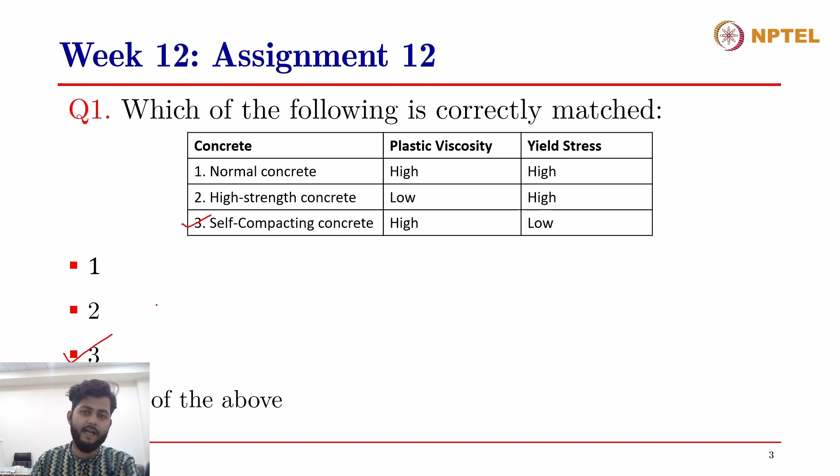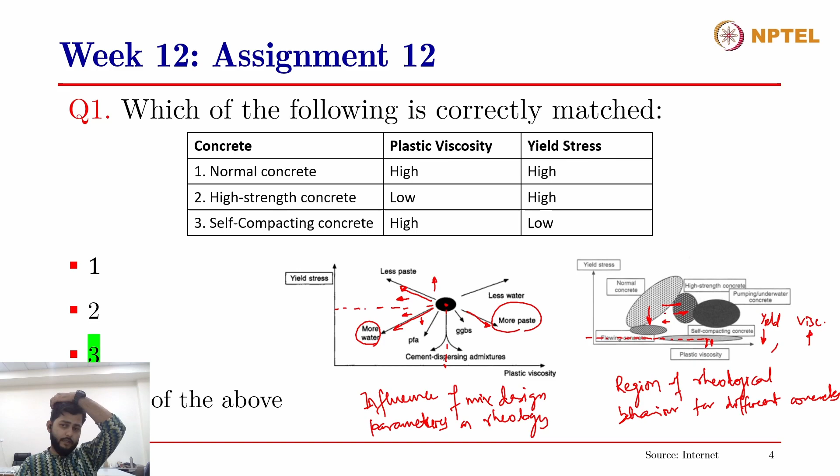Again, you need to also understand that self-compacting concrete mixes also contain a lot of cement. The cement content in these mixes is very high as compared to normal mixes. Therefore, the viscosity increases ultimately. But then you want a higher slump flow in this case. So you have to decrease the yield stress as well. In order to decrease the yield stress, they use a lot of superplasticizer as well. So this is how you can distinguish between the rheological behavior of different types of concrete.

All right. Moving on to the second question, which of the following statements is true? Statement one is L-box test is a measure of viscosity. Statement two is V-funnel test is a measure of segregation. Statement three is slump flow test is a measure of fluidity. Which one of these is true? Can you answer?

Yes. Would you like to answer, Abdul? Which of the following statements is true? Yeah, that is third, the slump flow test is a measure of the fluidity. Yeah. That is the correct one. The L-box test is not for viscosity. It is for another test. The V-funnel test is also not for the segregation test. That is another one. Actually statement three is the correct one.

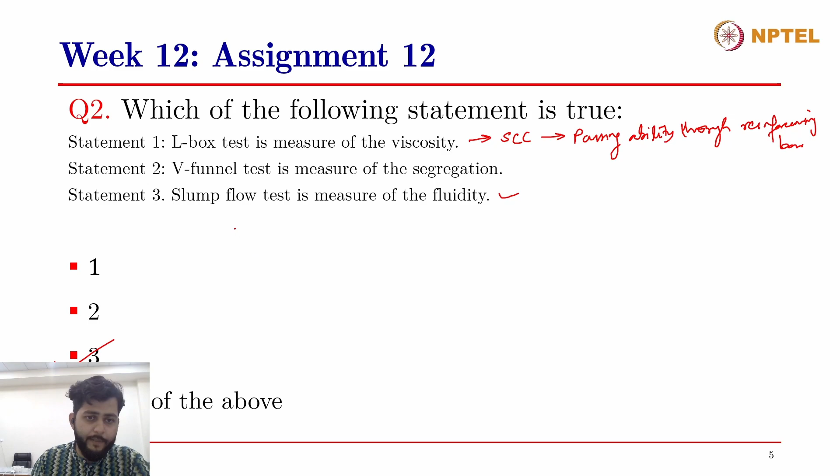But let us say you want to cast a concrete pavement using the same concrete that you are using to cast the raft foundation. Would it be possible? No, because for concrete pavements, you would require a roller compacted concrete or something of that sort, which has a very low slump, right? So in that case, the zero slump concrete is workable. So workability is application based. Then a somewhat more refined term is flowability or fluidity.

So now you're distinguishing between if the concrete will flow or not. So in that case, you can directly distinguish between a roller compacted concrete and a pumpable concrete, because a pumpable concrete will have a higher fluidity as compared to that of a roller compacted concrete, right?

So these tests, L box, V funnel, compacting factor, VB tests or slump flow test, we do call them workability tests, but they are actually empirical tests of flowability, right? And then a rather physical definition of flow is rheology. The very basic definition of rheology is the study of flow or deformation of matter.

So any material in this world could be studied for its rheology. We do study ideal solids in the case of solid mechanics, but there is no such material as an ideal solid. Every material has some viscoelastic deformation throughout its age, and therefore we should be able to study its rheological behavior. Now, in the case of flowable materials, the rheology is very distinct. It is visible directly. The resolution of the rheological behavior is very high.

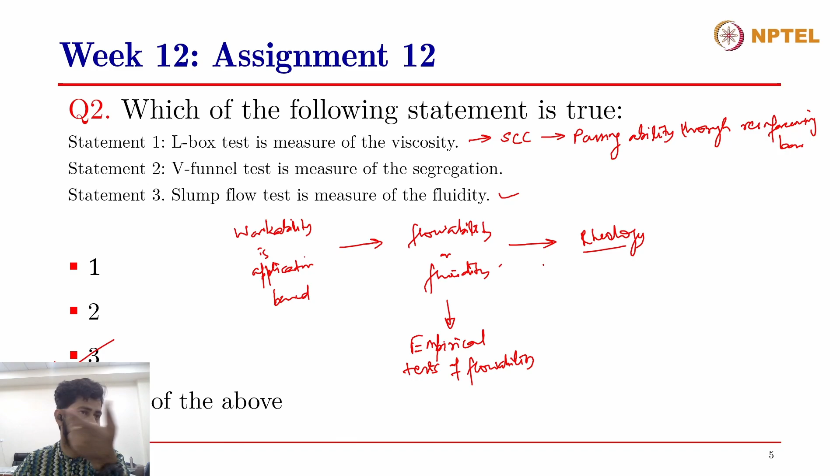But yes, V-funnel test can also be used to get an idea of segregation in the mix. I know of certain European guidelines on self-compacting concrete where they carry out a V-funnel test at T0, and then again fill the V-funnel, let the concrete settle for 5 minutes, and do the V-funnel test again. If within the 5 minutes the V-funnel times vary greatly, this could be a sign of segregation. There is no direct relation of segregation with V-funnel test.

All right. So the correct answer to this question is, in fact, slump flow test is a measure of fluidity. It shows the flowability in the concrete. Higher the slump flow, greater the fluidity. That's a very direct relation. All right.

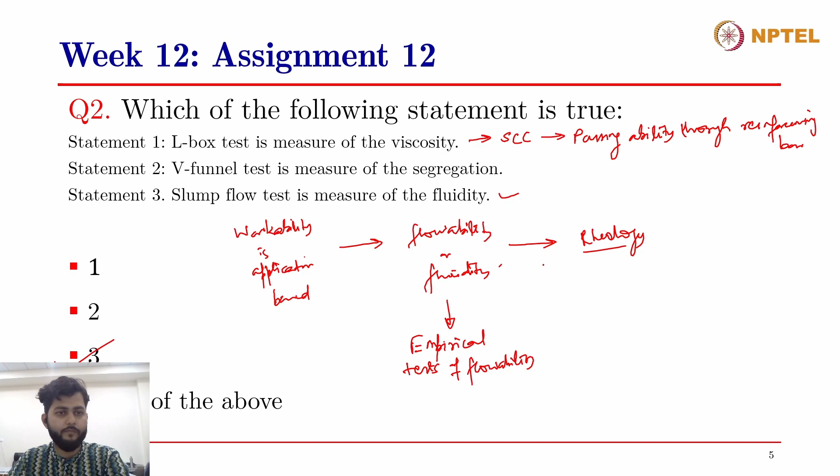The third question in this assignment was, which of the following statements is true regarding fiber reinforced concrete? Statement 1 was improves crack arresting property. Statement 2 is decreases the ductility. Statement 3 is improves the flexural strength. Which of these statements are true regarding fiber reinforced concrete? Yes, can you please answer?

Accepted answer 1 and 3. One, improves crack arresting property, and the third one, improves the flexural strength because of the fiber content. It improves the flexural strength and at the same time improves the crack arresting property. But statement number 2, decreases the ductility, is not correct. That means the answer is 1 and 3. Right. Thank you, Abdul. Yes, this is the correct answer.

So, in the case of fiber reinforced concrete, we know that concrete is a brittle material. So, when you put concrete under tensile forces or flexural forces, which ultimately lead to tensile forces in the bottommost fibers of concrete, it appears to crack and undergoes a brittle failure, right? Now, when you put any kind of reinforcement in the concrete, what we design the concrete to do is to allow the reinforcement present inside the concrete to take all the tensile load.

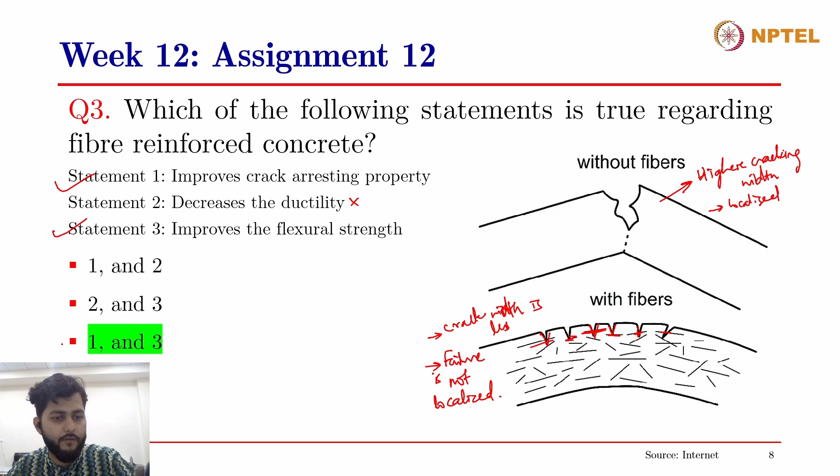Moving on to the fourth question: latex modified concrete is a type of polymer concrete composite, and latex behaves like rubber after coagulation. Is it a true or a false statement? Yes, sir. It is true because latex modified concrete, of course, has the nature of rubber. After coagulation, it is just like a rubberized surface. That means it is true. Right. Yeah. Thank you, Abdul. Yeah, that's the correct answer.

So latex modified concrete is basically when you replace some part of the cementitious material in the concrete by latex emulsion. It comes in the form of an emulsion in its raw state, and when it hardens, it behaves like rubber. So after coagulation, it behaves like rubber and has elastomeric properties, and therefore it adds more flexibility to the concrete, and in fact more elasticity. I would not say ductility, rather more elasticity to the concrete. Right.

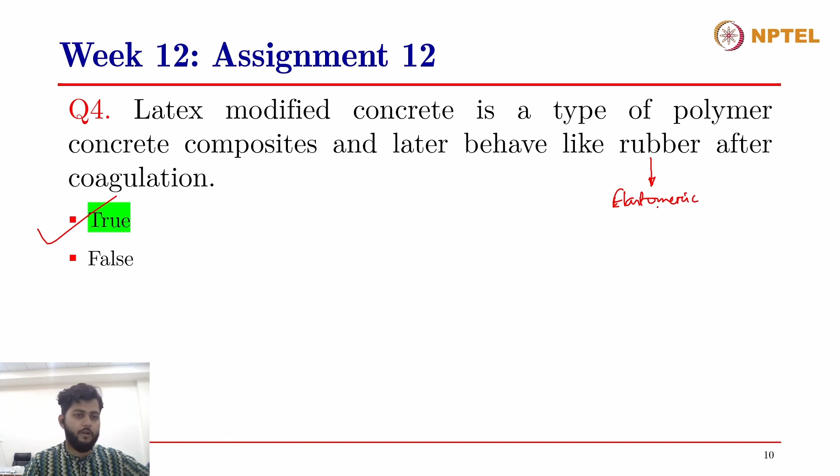Moving on to the fifth question, which of the following is correctly matched? The type of concrete and their applications have been given. The first one is latex type PCC, and the application is repair. Impregnated polymers, and the application is bridge decks. And heavy concrete, application being radiation shielding. Which of the following are correctly matched?

All are matching, sir. Latex type PCC is mainly used for repair purposes, and impregnated polymer is for bridge decking, because impregnated polymer gives a very high density and a very hard surface. Right. It is mostly used for bridge decking, but the only thing is impregnated polymer concrete is very expensive. But in special cases, especially for bridges, it is considered because the surface is very hard. That means the wear and tear will be less for bridge decking. Right. That is very important for the bridges.

And heavy concrete is mainly for radiation shielding, protecting an X-ray room and such, where gamma rays are present; that is protected with heavy concrete. Ordinary concrete is also mainly used for this, but it will be more thick.

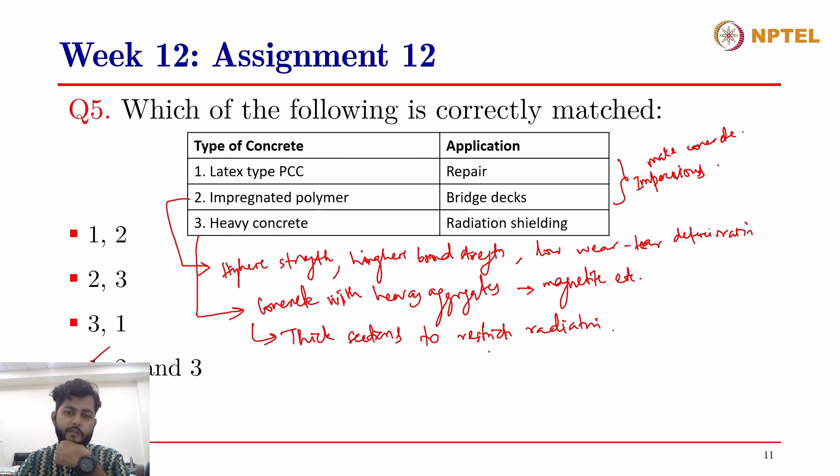Right? So the sections are also made thick, thick sections to restrict radiation. So this is heavy concrete which is used to make the walls and structural sections of nuclear reactors, right? So all these three are correctly matched, and therefore the correct answer is the fourth option.

Right? Moving on to the sixth question: which of the following are benefits of lightweight concrete? The options given are thermal insulation, sound insulation, both of the above, none of the above. Which of the following are the benefits of lightweight concrete? Yes, Abdul, would you be able to answer?

Yeah, this is thermal insulation. That is the main benefit of the lightweight concrete. At the same time, sound insulation is also sometimes used. So I have a doubt whether both of the above or only thermal insulation is correct. Little confusion. But according to me, my answer will be both of the above. That means thermal insulation as well as sound insulation.

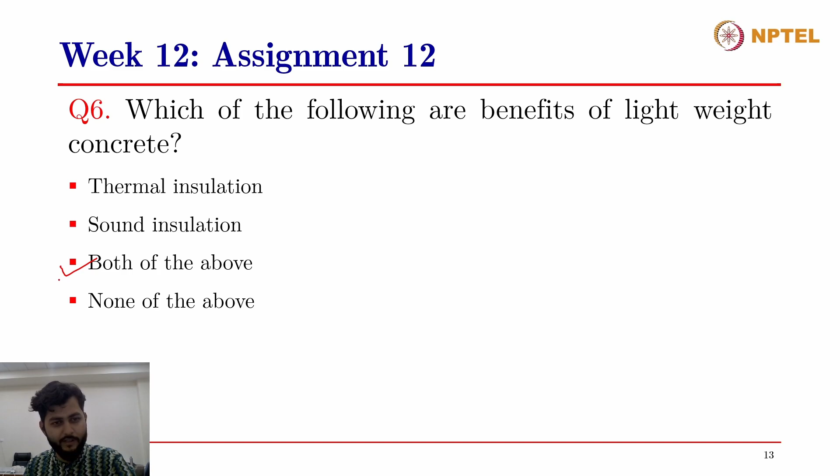Sound insulation is also taken because thermal insulation is mainly using this foam material, and at that time the sound effect is also reduced. Thermal insulation definitely gives temperature control. Right. So in my opinion, both of the above is correct. Yeah, this is actually the correct answer. You're correct. It has benefits for thermal insulation as well as sound insulation.

So in the case of lightweight concrete, we use these lightweight aggregates, and I've taken these photos from the internet. Thermocol granules are also sometimes mixed with the concrete, with chemicals to make bonding, to make it lightweight. Yeah, from my experience also, we use lightweight concrete for roof insulation and waterproofing, 50 or 30 thick, then we do the waterproofing layer over that. So in that case we get thermal as well as sound insulation.

Yes. So the thermal insulation comes from the insulation provided by the air entrapped within the voids of these aggregates and the whole of concrete, right? And since the air is entrapped within the various layers of the concrete, it insulates the temperature transfer between the inside and the outside surroundings of a given structure, and therefore it provides good thermal insulation.

The sound insulation comes from the sound being absorbed by this hollow material, as you'd have seen in recording studios, game rooms, or theater complexes, where walls are made with foam insulation so as to restrict the sound from going out of the theater room, right? So when there is a hollow material which can absorb the sound, that will give you good sound insulation as well.

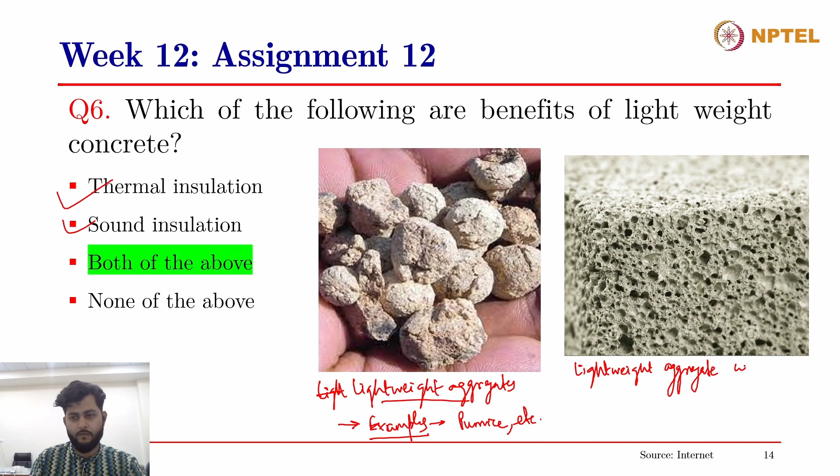Moving on to the seventh question: geopolymer concrete does not use cement in its production. Is this a true or a false statement? Does geopolymer concrete use cement in its production? Is it true or false? It is true. Yeah. Geopolymer concrete does not use cement in its production.

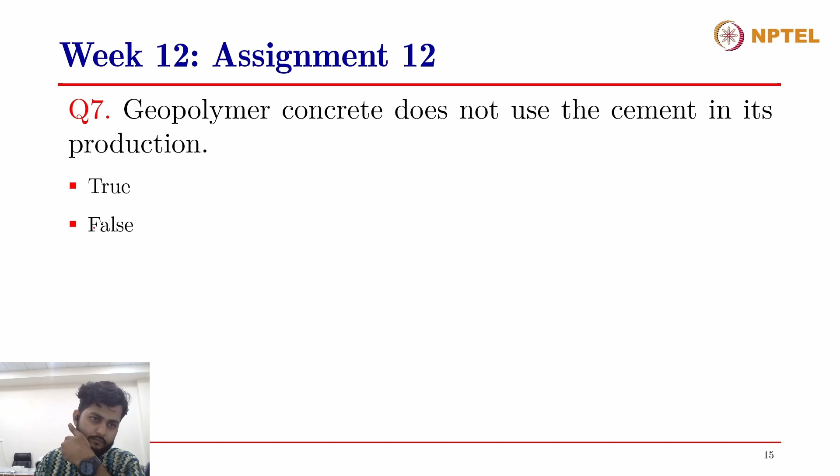Geopolymer itself, it is a synthetic byproduct actually, isn't it? Geopolymer, not exactly. So the correct answer is yes, it's true. It doesn't use cement in it. What it uses is majorly hydraulic slag, and it could also use fly ash, right?

And it uses activator solutions, alkali activator solutions, in order to activate the pozzolanic properties in these supplementary cementitious materials, right? And finally, it uses water and aggregates to make the geopolymer concrete. So these are the components of geopolymer concrete.

Generally, the activator solutions. Yeah, go ahead. Mostly where are we using geopolymer concrete? It could be used anywhere actually, but the good thing about geopolymer concrete is that you need not use any cement, and the cementitious materials you're using are industrial byproducts or waste materials, slag or fly ash, right? So essentially, you're making your concrete with a very low carbon footprint.

So the major benefit of this is a very low carbon footprint if you don't consider the part of the activators, because activators are chemicals which are made in industries, and they add to the carbon footprint of the whole concrete. So there is a whole debate going on between researchers if really geopolymer concrete is a good step towards reducing the carbon footprint of concrete. That is one part of it.

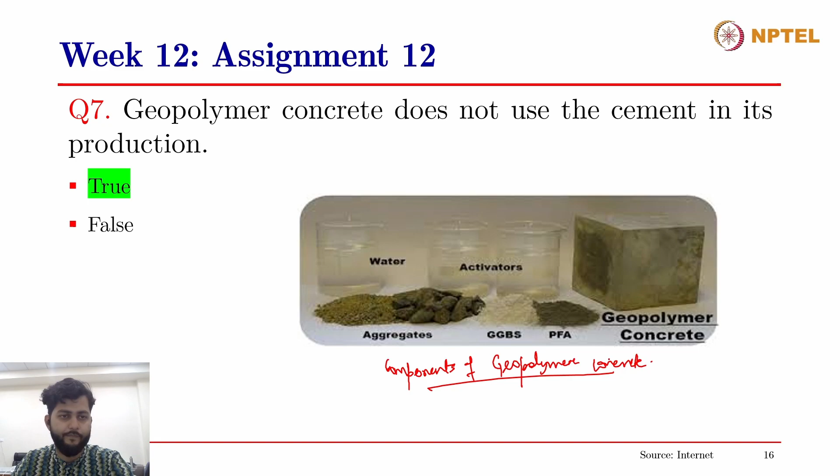All right. Okay. Moving on to the last question of this session. Which of the following materials used for construction have the highest embodied energy in the building? Concrete, steel, aluminum, plastics. Which of the following materials used for construction have the highest embodied energy?

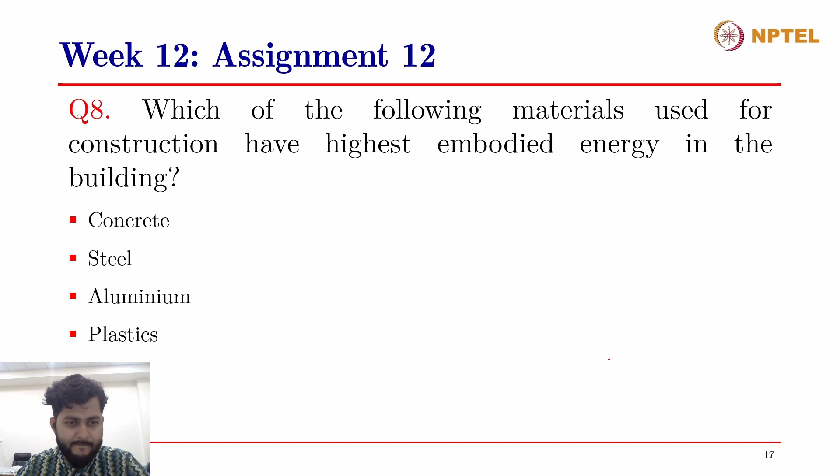Of course it is concrete, because the production of cement produces carbon. Environmentally, I think about 10 to 15% is coming from the production of cement. After the petroleum products, the second one making the environment harmful is cement production. I think it is 10 to 15% coming from the cement production.

I think India is the second largest country in cement production after China. That means China is the first one, the second one is India. That means environmentally it is harmful. Maybe 10 to 15% of environmental disasters come through cement production. That means concrete is the material considered to have the highest embodied energy. Of course it is concrete, right? Yes, thank you, Abdul.

So, the interesting fact about this question is that, as hard as it is to believe, concrete is not a very environmentally cruel material, if I would put it that way. It's not that harmful as compared to other building materials that we use to produce our structures. But the sheer volume of concrete that we use to make our infrastructure overshadows the fact that concrete is actually a good and could be an eco-friendly material.

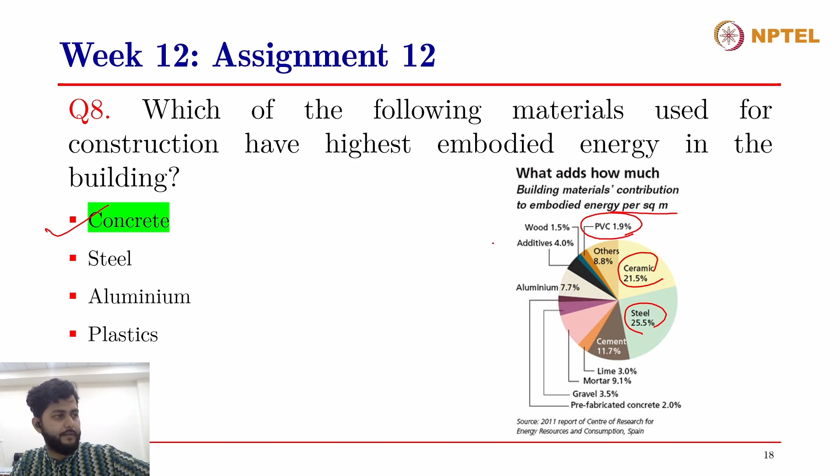I'm not sure exactly. That is on the 27th, I already received the timetable. I am attending and already registered. I have done more than 7 NPTEL courses, applied for all the examinations and got the certification for all of them. Some courses I got the Elite certification also, that means I scored 70% and above. Right, you had told me that last week. Actually, I'm just updating my knowledge, because now I am not in service, I'm retired. But with my experience I can contribute to others, the younger generation. That's interesting for us, in fact.

I very much appreciate these NPTEL courses. I always suggest to the younger generation to go for them, because the Ministry of Education is spending a huge amount on this, and they are not charging a single rupee in fees. These facilities have to be utilized to the maximum. Not only that, this platform is very high level, with all the IIT professors. I am very happy with their classes. Sometimes if there is time, I definitely go for their classes. Anyhow, the younger generation has to utilize it.